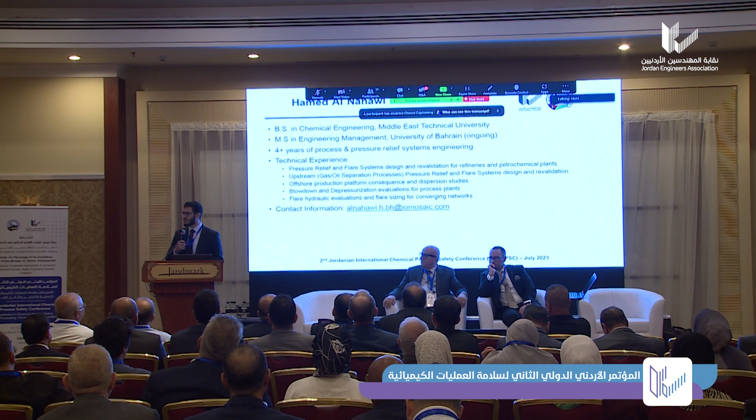I'll start off by introducing myself to you, your speaker, Hamed Al Nahawi. I'm a chemical engineer by profession, did my bachelor's in chemical engineering and currently doing a master's degree in engineering management. I've been working in the process safety consulting sector for about 4.5 years now, and I specialize in pressure relief and flare systems design. So this is just a brief introduction as to who your speaker is and my relationship to the topic that we will be talking about.

To start off, I'd like to give you a brief outline on what this presentation is about. We're going to start off by introducing some background regarding what the Port of Aqaba means to Jordan, what this location means in general to the incident and its importance. And then I'll briefly touch upon chlorine toxicology and information regarding chlorine, just to set things in perspective for everyone. And then we'll have a closer look at the incident itself, the consequences that took place and the risks that are associated, and the lessons that we were able to extract as a personal or professional interpretation, I should say, of the incident.

I'd also like to draw your attention to the fact that this paper in this presentation was also highlighted in the CCPS Safety Beacon sponsored by our company, ioMosaic, and it was also presented in the Global Congress on Process Safety, so that this incident in general takes enough international echo.

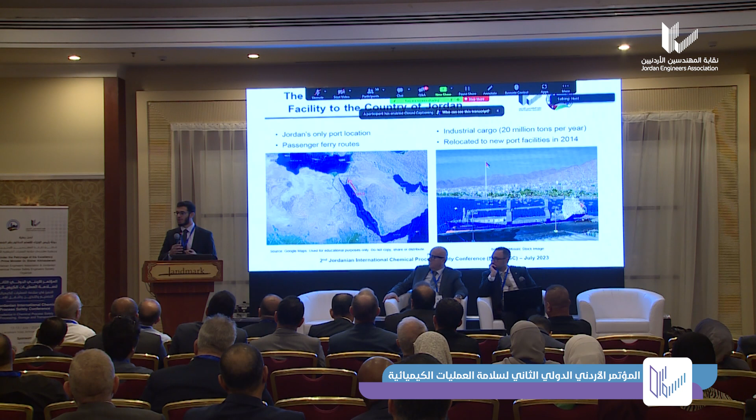So to start off by setting things in perspective and where this incident took place, it took place in the Port of Aqaba, and as the Jordanians would know, maybe not so much the international guests here, the Port of Aqaba is actually the only access that Jordan has to the sea. And this makes it a very, very critical place, not only for tourism, but also for cargo, and it has about 20 million tons per year of cargo traffic going through this location. It's also a restricted geographical location, which makes such an incident in such a confined location more and more dangerous. And thankfully, some of those factors were mitigated by the conditions that were prevalent during the time of the incident, as we will see later on.

So what took place was that on the 27th of June last year, there was a transportation intended of some chlorine tankers that were being lifted onto a ship, and those ISO tankers containing about 25 tons of liquefied chlorine were being lifted, and at that time the lifting cable snapped and dropped the chlorine ISO tanker onto the ship, causing it to catastrophically rupture and causing all the chlorine within the ISO tanker to immediately vaporize and spread into a vapor cloud, causing the subsequent death of 13 individuals and more than 250 injuries at the time.

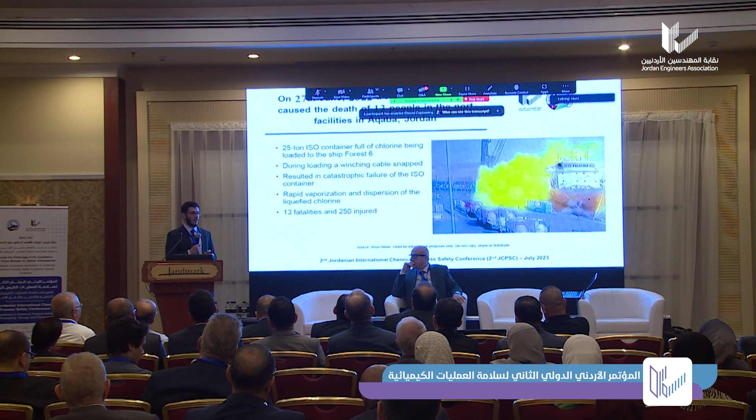Chlorine in general is dangerous, and Dr. Ammar touched upon this. We understand that chlorine is dangerous, but we understand that it is also very important. It is very important because we have a lot of uses for it, and some of those critical uses cannot, at the time being, be substituted immediately by something that is safer.

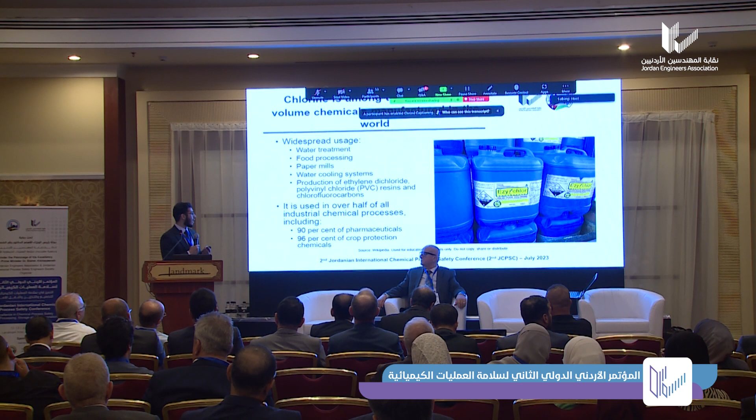Chlorine is used as a disinfectant in some water treatment processes, whether for drinking water or wastewater treatment. It's also used in food processing, in paper mills, and in production of ethylene dichloride and production of PVC in general. You may even be interested in knowing that over half of all industrial chemical processes include the use of chlorine, and it's actually used up to a 90% level in pharmaceuticals and perhaps slightly even higher in crop protection chemicals.

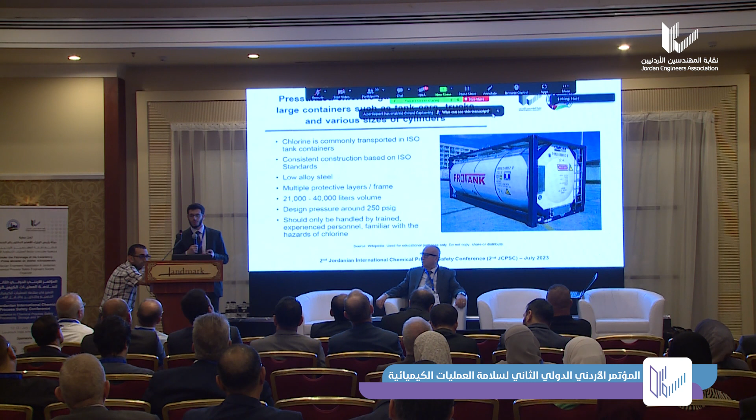With this said, chlorine needs to be transported safely because we understand it is quite dangerous to carry. And we carry chlorine in ISO tankers. This is a common method to transport chlorine in ISO tankers, which are specifically designed to carry dangerous goods, whether in the liquid form or potentially in the vapor form.

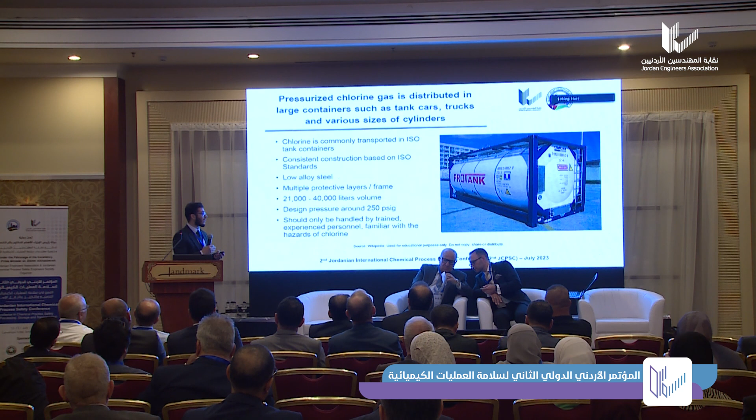And you can think of those ISO tankers as small portable pressure vessels. They are designed to withstand design pressures up to 250 psig and can also work at pressures around 220 or slightly less psig. So this is quite a high working pressure, and they can also carry large volumes ranging between 21,000 to 40,000 liters.

They are, as I said, quite reliable, quite cost effective, and it has been a very common way to transport certain chemicals, especially because we learned how to deal with ISO tankers and we learned how to carry them well, and we find that the level of risk associated with transporting certain chemicals using ISO tankers is generally an acceptable level of risk.

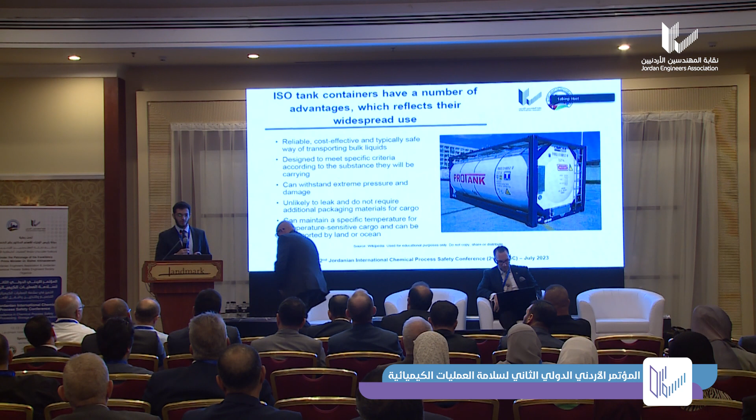So chlorine as a chemical itself is a yellow-green vapor at room temperature, and it has quite a pungent and irritating smell. It is also approximately 2.5 times heavier than air. So as we will see when we're looking closer at the incident, chlorine tends to settle around and not to spread very easily. It is not flammable; however, if it was, then we would have been looking at risks of explosions or risks of vapor cloud fires that could have taken place at the time of the incident.

Chlorine is also slightly soluble in water, and once that takes place, there are some reactions that can take place with chlorine, which allows it to generate hydrochloric acid or hypochlorous acid. Those two chemicals are actually what make it quite toxic to the human being, because once it enters the lungs, it starts to form those acids and to damage the lungs, and essentially the person ends up drowning because the lungs start to fill up with liquid, which is not the intended way for the lungs to function.

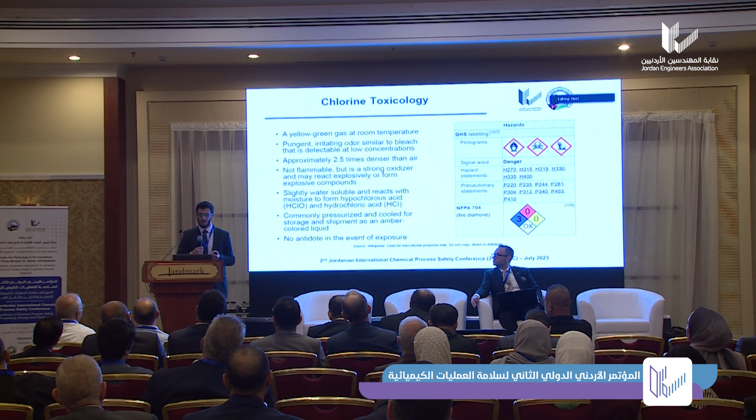Chlorine toxicology can be looked at in more detail when it comes to process safety and risk management, and there are officially published limits for different toxic chemicals. The acute exposure guideline levels, or AEGL, are limits published by official bodies that quantify the risk in terms of levels, and we look at factors including exposure to concentrations of chlorine and the duration at which you are exposed to chlorine.

So we can see that there are categories. Level 1 is where you experience notable discomfort and irritation, however, not necessarily any symptoms that would last or be dangerous to health in the long term. On level 2, there are some irreversible and other very serious, long-lasting effects that the person will start to experience because either they have been exposed to this toxicant for quite a long time, or they have been exposed to the toxicant at relatively high concentrations.

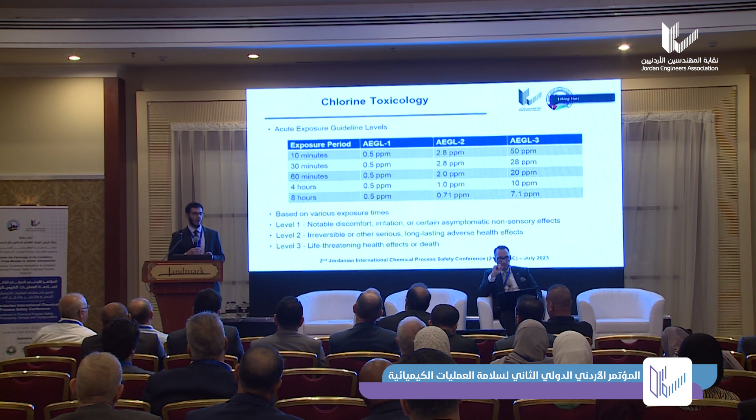And at level 3, we will start to experience fatalities, unfortunately, and health effects that are quite severe to the human being. So we can immediately infer that the 13 casualties that happened were exposed to chlorine concentrations at level 3.

Looking closely at the incident now, to start looking at the details and then extracting the lessons from this. The time of the incident was luckily caught on CCTV, and this allows us as process safety professionals to chase after the details, try to learn from them and reconstruct the incident, because modeling incidents is a very good way to understand that should certain conditions have been different, maybe the consequences would have been a lot worse than what we have seen. And this is what we will touch upon in a few minutes.

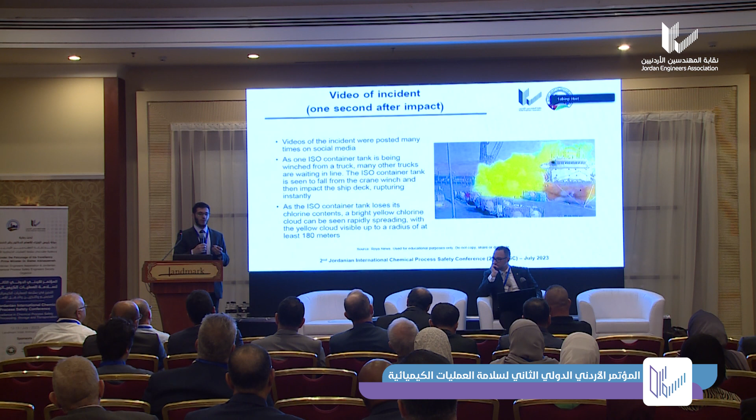So at the time of the incident, this screenshot is taken 1 second after the impact, 1 second after the catastrophic failure of the ISO tanker. And we can see that there is a very distinct yellow cloud forming around the ship. And if we look closely at the color, it is not a transparent cloud yet, and it is bright yellow, telling you that the concentration is still high at that place.

Looking just 3 seconds after that screenshot, you can see that this cloud is starting to spread over. However, it has not mixed with air or spread outwards. It actually started to fall downwards towards the ground and to spread along the ground. So at this point, we definitely know that there are some employees and staff around this cloud that were either directly engulfed by this cloud or being exposed to the concentrations therein.

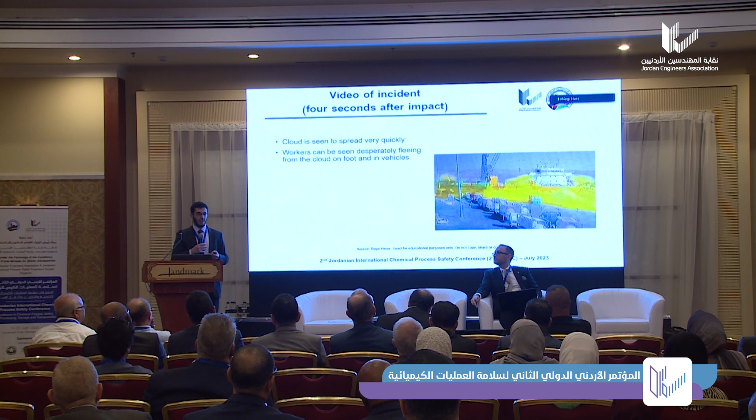And slightly after, at 6 seconds after the impact, you can see that the color of the cloud started to slightly dilute. The cloud is more transparent and is trying to move, spread and disperse. However, it is still quite visibly yellow, and we can tell that there are still quite high concentrations at this point.

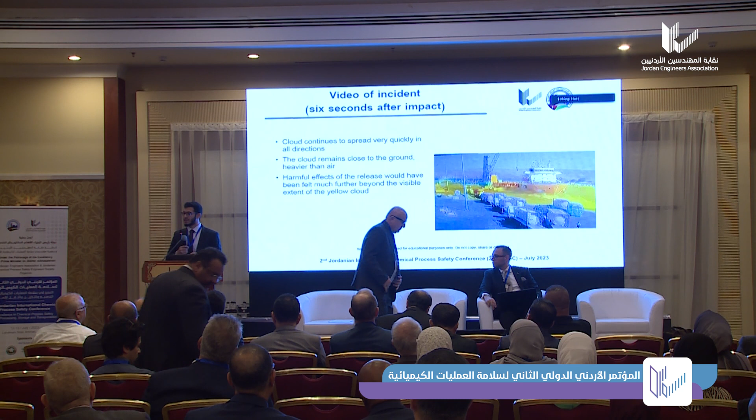So what we ended up doing when we were trying to look at this incident is that we used our proprietary and industry-grade software to try and model the incident that took place. So we used our software called SuperChems to try and model this and see how the cloud dispersed according to the givens that we had.

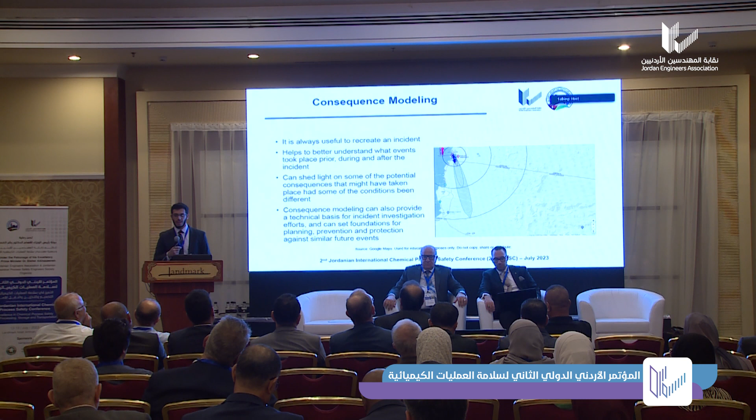So we tried to recreate this to understand and to sort of chronologically model the situation to see how the consequences looked. And as you can see on the right-hand side, this is a screenshot of the vapor cloud that formed and how over time it spread in the geographical location of the incident.

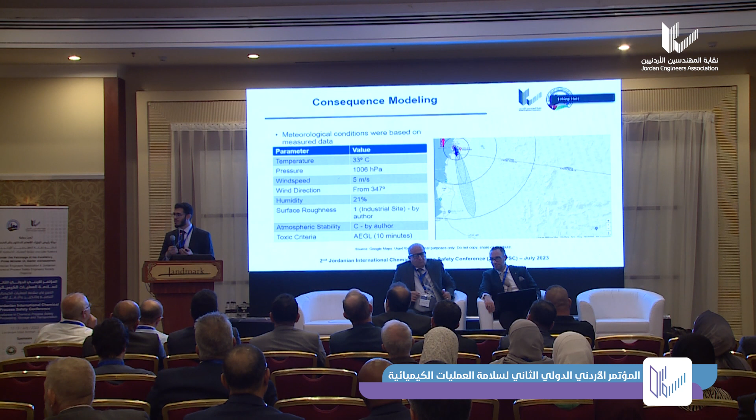Then we had to infer an atmospheric stability class and a toxic criteria. So based on the conditions, it seemed logical to infer an atmospheric stability class of C. So to model the situation, we also tried to look at the conditions within the ISO tanker right prior to the catastrophic failure of the tanker.

So we mentioned that ISO tankers generally operate at around 220 or 217 psig, and that was the starting pressure that we chose, and starting release temperature of 91 degrees Fahrenheit, and a total inventory of 50,000 pounds within the ISO tanker. We also visually scaled the images that were provided to us, and we were able to estimate the hole size and the area of the holes that took place.

So we can see that there are two notably large holes or punctures in the ISO tanker, and we have combined those into a single area for simplicity and used a very conservative discharge coefficient.

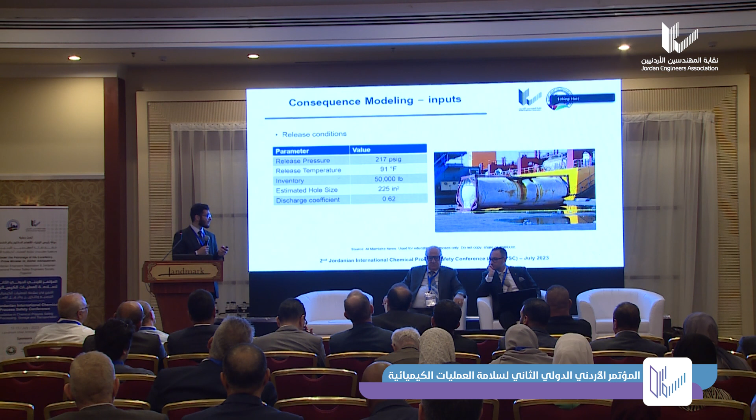So as you can see, this is a curve for the depressurization of the tank that took place, and we can see that really the contents of the tank were almost immediately depressurized, and very swiftly within about 0.04 seconds the entire inventory of this tank was released to atmosphere and thus vaporized as well, encompassing the area in a split second, as we say. So we can also see the venting history, and we can see that the entire mass as well was able to escape this tank in a very short period of time.

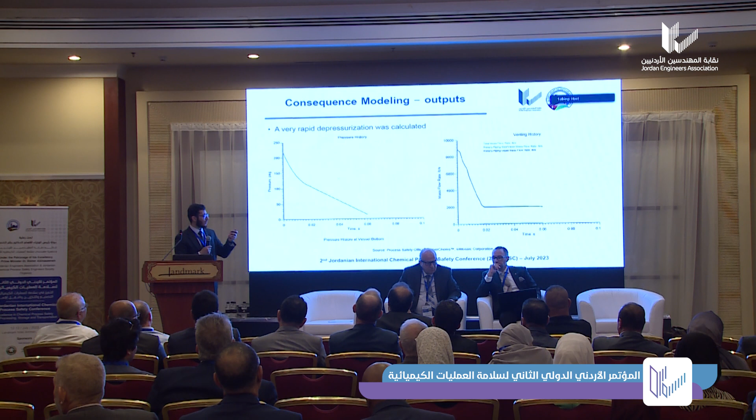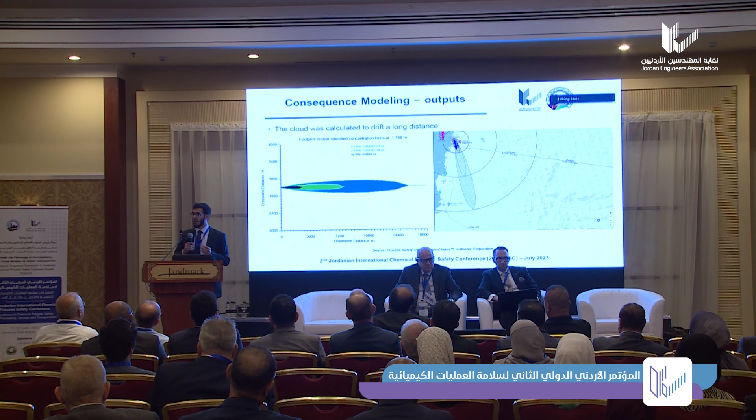Then we look here at the cloud that drifted and at the different AEGL levels that we were discussing. So we set the AEGL levels, and we tried to see at each level to which extent or to which downwind distance did the cloud spread. And you can see that at AEGL level 1, the relatively safe but slightly irritating levels, the cloud has spread quite distantly to more than 14,000 meters. However, the actual AEGL 3 level cloud was also engulfing an area of about 3,000 meters, around 3 kilometers in radius.

So from the consequence model, we were able to infer that thankfully, because the conditions were warm and slightly windy during summer, and because the prevalent wind direction was favorable, the cloud ended up moving in areas with less inhabitants. Should the conditions have been different, potentially this vapor cloud could have moved in areas where tourists were located on the beaches of Aqaba, and we would have been looking at a much more

catastrophic situation. Not to say, of course, that the situation is not catastrophic as it is, because one fatality is too much and one accident is too much. But we can still learn from this and we can still improve. So thankfully, the prevalent wind directions were favorable.

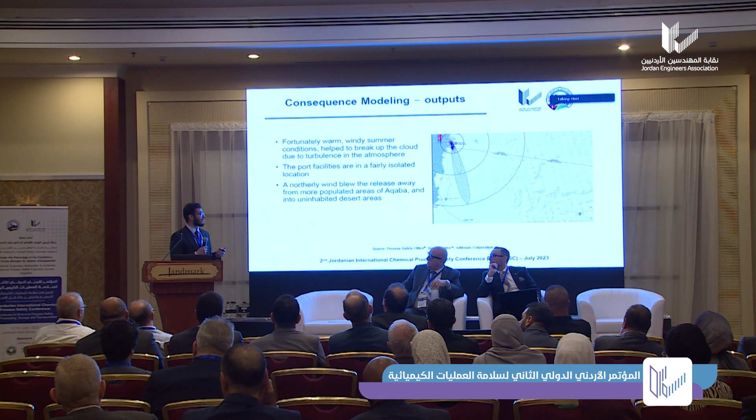Also, the incident generated a huge media coverage, and there was immediate pursuance from the king himself, and immediate instructions to the government to take immediate actions to start investigating. And this is something we don't typically see internationally; investigations of such incidents sometimes end up taking too long, sometimes periods of up to 1 year or even more, by which time people would have forgotten some of the details. I'm talking about the general public, and the topic is not as relevant to them.

But fortunately, in this incident, because of the immediate media coverage, because this became more or less a matter of public perception as well, investigations were quite prompt and actions were also quite prompt. The primary cause, as we said, was the use of improper lifting equipment. The equipment that was used to lift this tanker onto the ship was out of spec, was not properly designed.

Actually, people did not really know what the design parameters of those equipment were, and they were also fatigued and overused, and hence the accident took place. The lifting slings were designed for a maximum load of about 8.6 tons, which is almost 3 times less than what it was actually carrying at the time.

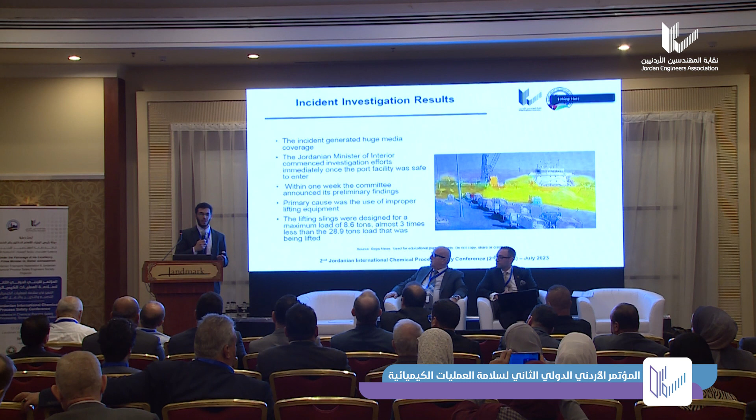With this said, we'd like to also draw your attention to the fact that we are not even certain that those equipment were designed to 8.6 tons, because they didn't have any nameplates or any documentation that can actually support the perceived design of the equipment.

The investigations revealed that this was only the second time that hazardous chemicals were being handled at the specific port location, and with this, the port staff were not adequately trained or were not competent to be dealing with chemicals. Some investigations also tell us that some of the staff members were not aware whether the tankers were full or empty in the first place. So they didn't know what they were carrying, and they didn't know how dangerous this was.

And this could be inferred by seeing the CCTV images that show some individuals running towards the cloud, not away from the cloud, at the time of the incident. Also, the failed cable was, as we said, worn out. It was rusted. It was lacking technical specifications, as officially phrased by the investigating committees.

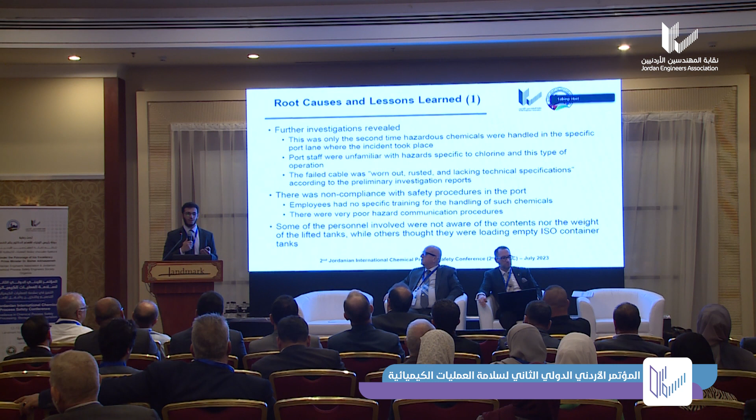There was non-compliance in general in safety procedures at the port facilities, and there wasn't adequate supervision during the time of the incident. Supervisors in charge of the safety of certain hazardous procedures like this were not available at site during the time of lifting those tanks.

So the investigations thus tell us that the supervisory role was almost completely absent, and the general lack of safety culture at the port facilities was identified as the major and root cause of the incident. So the direct cause would be the use of improper lifting equipment, but the root cause is the complete absence of safety culture in the ports.

With this said, we can use this information not necessarily for purposes of accountability, which is important when we have accidents, but in this venue, we are discussing this for recommendations, conclusions, and to be able to learn from such incidents and prevent their repetition.

So one lesson learned is that we need to all understand the risks associated with any process. There isn't a risk-free process, and we cannot avoid those risks, but we can mitigate those risks and bring them to levels that are generally accepted so that incidents are not taking place or they're not fatal to people.

We can ensure proper training for personnel who are being involved, and as the minister himself said today, it is the right of the employees to be working in safe environments. So we need to ensure, as process safety professionals and as people in charge, that the staff are trained well and they are able to handle the equipment and able to handle the chemicals should anything go wrong.

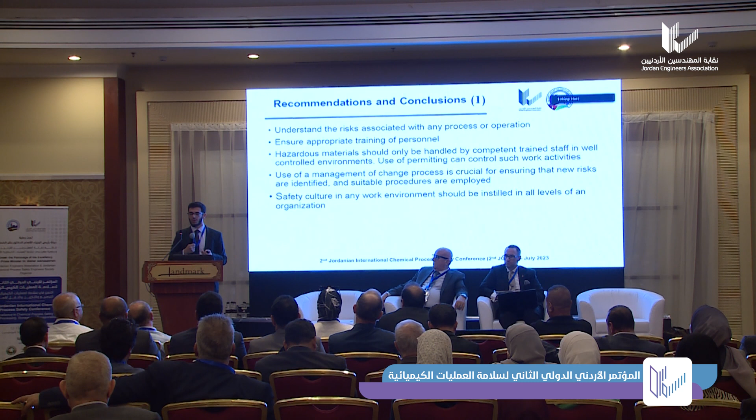So safety culture in general in a working environment should be instilled at all levels, starting from the most basic staff members up to the management, so that people will generally adopt this safety culture and understand how to protect themselves and to protect others.

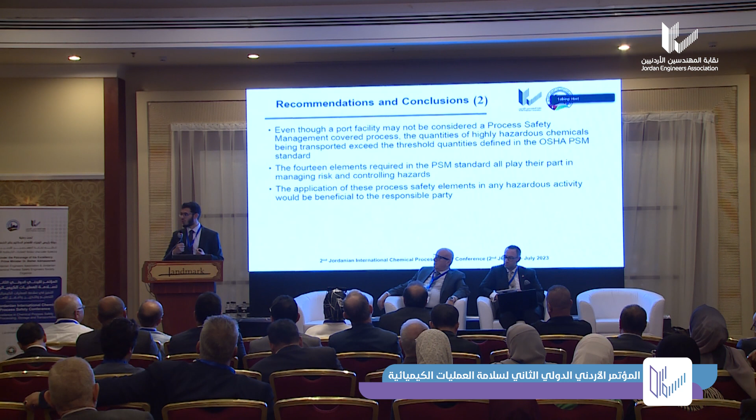Also, we need to identify that the port facilities, as I mentioned, are not necessarily covered by process safety management procedures. However, with highly hazardous chemicals, it's always a good idea to use internationally recognized and internationally employed standards and procedures to control the use and the operation of processes that involve transportation of hazardous chemicals.